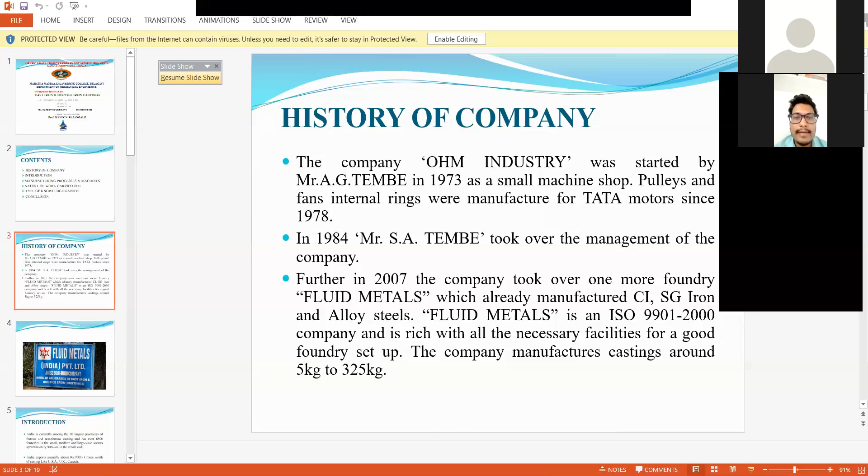Introduction: the Indian foundry industry occupies a place in shaping the country's economy.

India is currently among the 10 largest producers of ferrous and non-ferrous castings and has over 6,500 foundries in the small, medium, and large scale sectors. Approximately 90% are in the small scale industries.

India exports annually above 7001 crores worth of castings to countries like USA, UK, and Canada. However, there is still a lot that needs to be done to improve this further.

The export of casting from India is around 1% of the world requirement, and in order to increase these exports, the Indian foundry industry has to equip itself with the latest technology such as automation and casting simulation, etc.

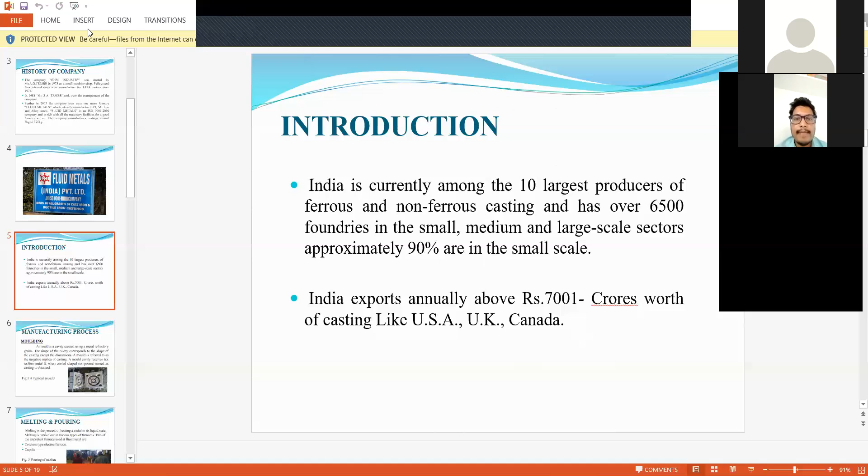Next is the manufacturing process. It is a stepwise process. Casting is a manufacturing process in which molten metal is poured into a mold containing a hollow cavity of the desired shape, and then allowed to solidify. The solidified parts are known as castings.

Next is molding. Figure 1 shows a typical mold. A mold is a cavity created using metal refractory grains, and is referred to as the negative replica of the casting. The mold cavity receives the hot molten metal, and when cool, the shaped component named as the casting is obtained. The figure shows a typical green sand mold.

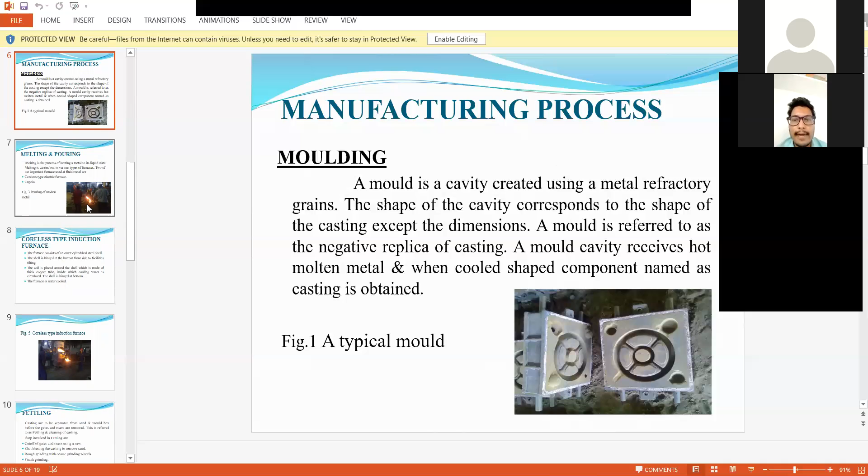Next step: melting and pouring. Melting is the process of heating the metal into its liquid state. Melting is carried out in various types of furnace.

There are two types of important furnaces used for fluid metals: the coreless type induction furnace and the cupola furnace. Figure 3 shows the pouring of the molten metal.

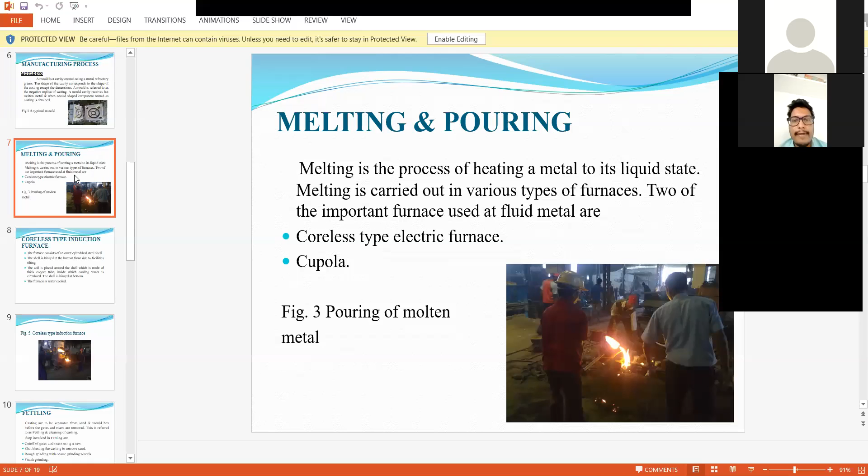Next step is the coreless type induction furnace, also known as the electric induction furnace. The furnace consists of an outer cylindrical steel shell. The shell is hinged at the bottom front side to facilitate tilting. The coil is placed around the shell, made of copper tube, inside which cooling water is circulated to protect it from overheating, and the shell is hinged at the bottom. The furnace is water cooled, and the crucible refractory lining is formed by ramming granulated material between the coil and the hollow interior.

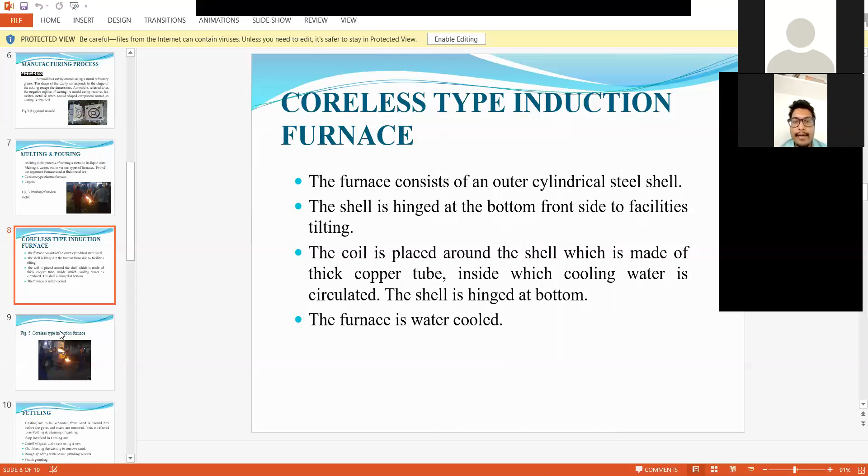The coreless type induction furnace is commonly used to melt various alloys of steel and iron, producing the molten liquid metal.

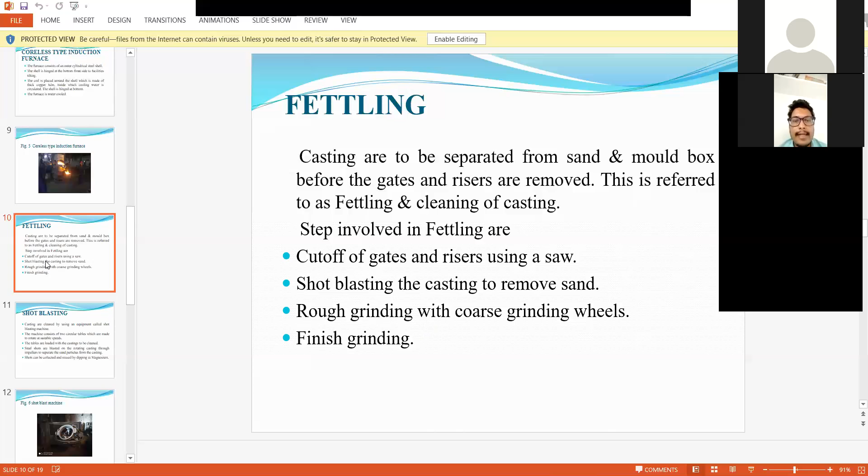The next step after fettling is shot blasting. This is a casting cleaning process used to polish the metal. The casting is cleaned using equipment called a shot blasting machine, which is carried out once the core has been removed from the sand mold.

The machine consists of two circular tables which are made to rotate at a suitable speed. The tables are loaded with the casting to be cleaned. The steel shots are blasted on the rotating casting through the impeller to separate the sand particles from the casting. Then the steel shots are placed on the table.

When the steel shot media is channeled, the abrasive steel shots are accelerated and thrown at high velocity in the direction of the surface of the work material. This is perfect for finishing, and the shots are collected, recycled and reused by dipping in magnesium.

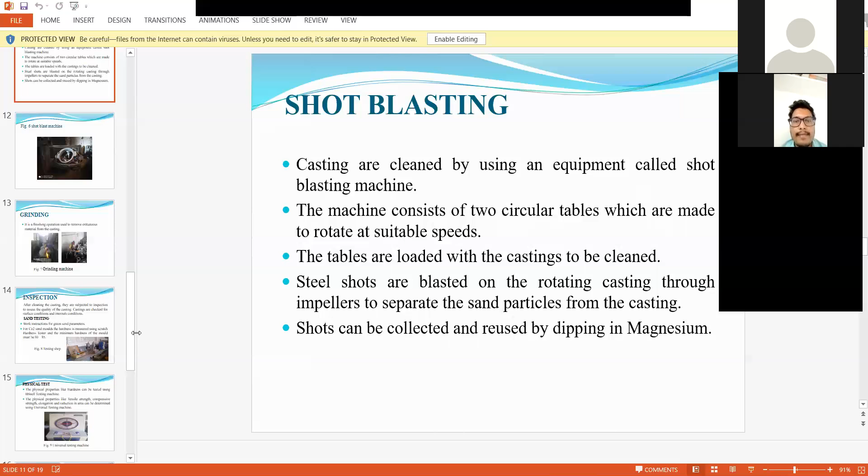The figure shows the shot blasting machine.

After shot blasting, the next step is grinding. In this process, it is a finishing operation used to remove extraneous material from the casting.

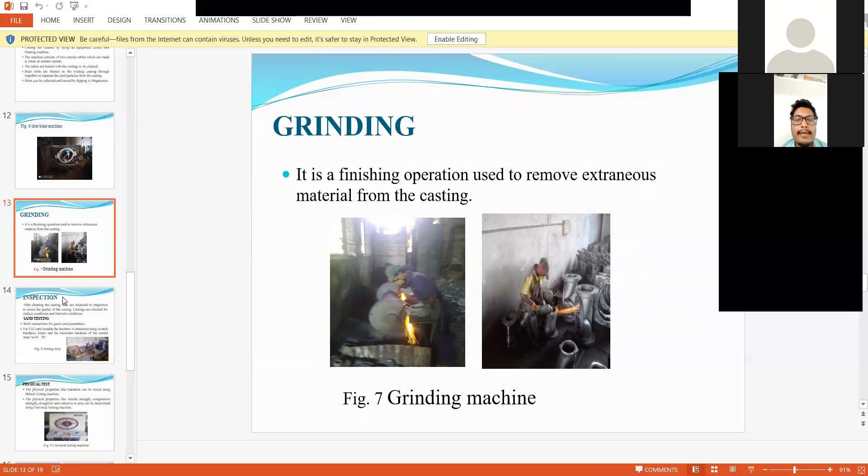The last step is to check the casting for cracks and defects; this is the inspection stage. After cleaning the casting, it is subjected to inspection to assess the quality. Castings are checked for surface condition and internal condition.

In the usual inspection, common defects such as surface roughness and surface cracks are detected by visual inspection of the casting. For sand casting, there is a work instruction for the green sand parameters and the carbon dioxide sand molds.

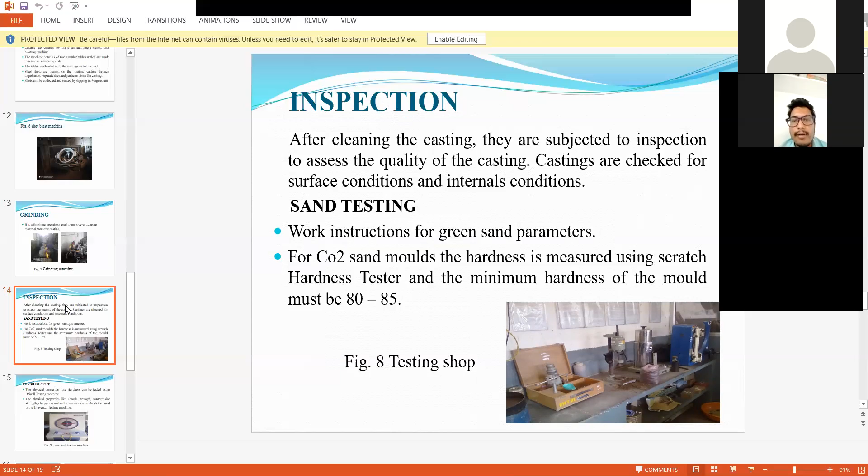The hardness is measured using the scratch hardness tester, and the minimum hardness of the mold must be 80 to 85. Figure 8 shows the testing shop of the cast.

Next is the physical test. Figure number 9 shows the universal testing machine. Physical properties like hardness can be tested using the Brinell test machine. Physical properties like tensile strength, compressive strength, elongation and reduction in area are determined using the universal testing machine.

In this test, a specimen of given dimensions is held in the jaws of the machine, and then the load is applied uniformly until the specimen breaks. A recorder is used to record the graph of the stress-strain properties, and with the help of this graph, the different properties are calculated.

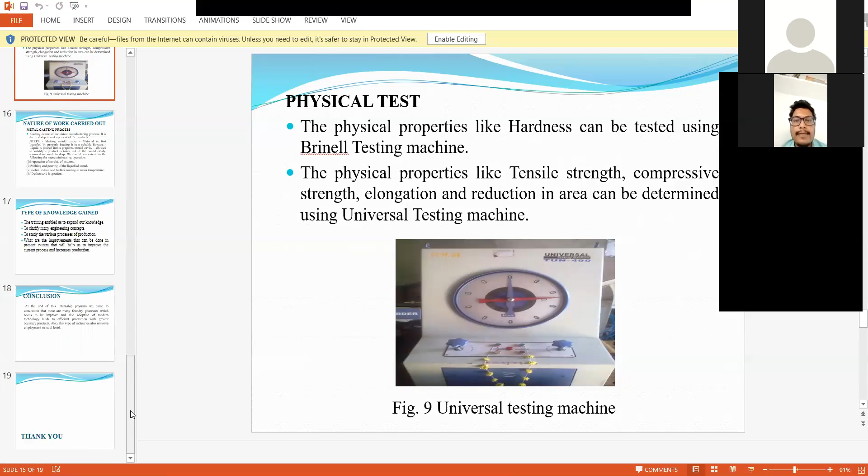Next, the nature of work to be carried out. In the metal casting process, casting is one of the oldest manufacturing processes.

It is the first step of making most products, making the mold cavity. Material is first liquefied by heating it in a suitable furnace, then the liquid is poured into a prepared mold cavity and allowed to solidify. The product is then taken out of the mold cavity, trimmed and made to shape.

We should concentrate on the following for a successful casting operation: preparation of the mold and pattern, then melting and pouring of the liquefied metal, then solidification and further cooling to room temperature, and the last step is inspection, checking for defects in the casting.

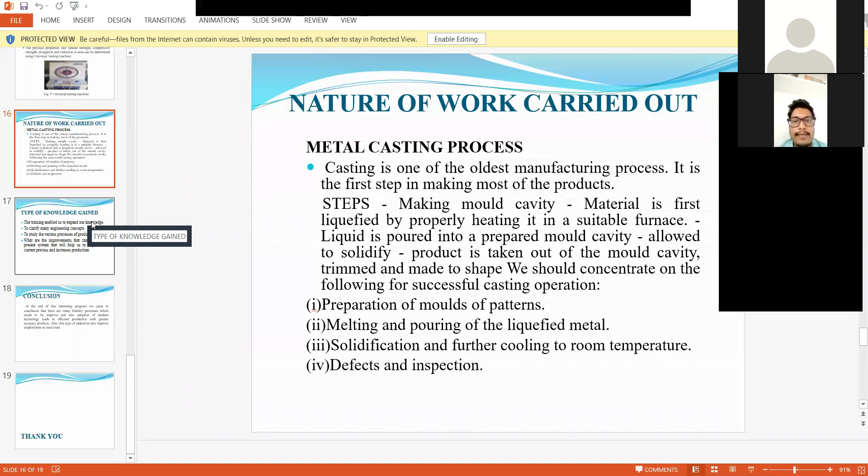Next, the types of knowledge to be gained in this industry. The training enables us to expand our knowledge, to clarify many engineering concepts, and to study the various production processes. It tells us how production processes are carried out, from raw materials to finished products, and what improvements can be made in the present system to help improve the current process and increase production.

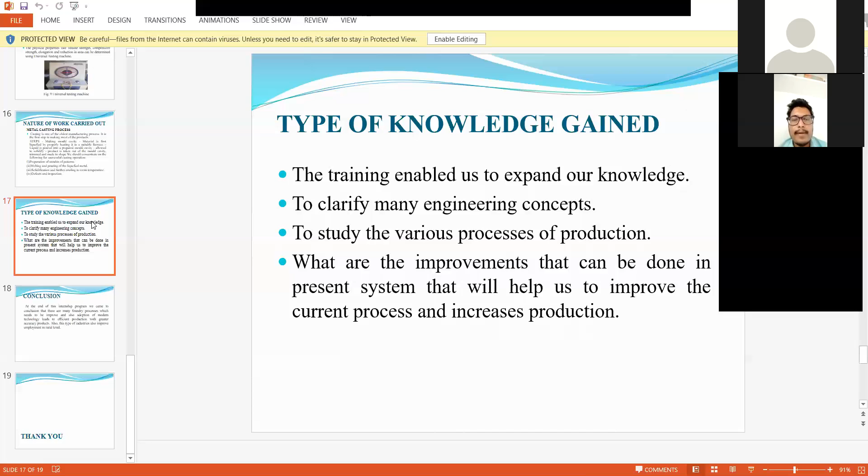And conclusion. At the end of this internship program, we can conclude that there are many foundry processes which need to improve, and also adoption of modern technology leads to efficient production with greater product accuracy. Also, this type of industry improves employment at the rural level.

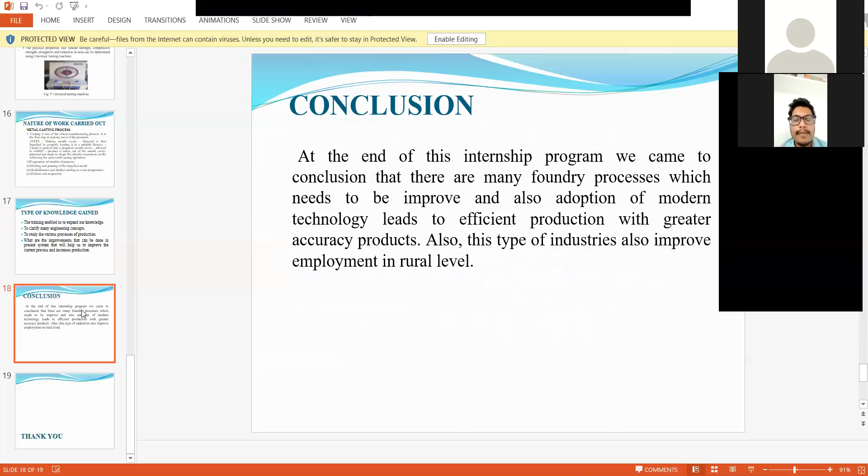Okay, Sujit. In total, how many departments are there in that small factory, in the plant? So in total, how many sections are there? Three to four sections. Three to four. Okay. In one section, sir, inspection and detection machines are there. In another, cupola and coreless type induction furnace is there, and the other section has shot blasting machine and grinding machines.

And the designing, where they are doing it, which software are they using for designing these mold castings? So which software are they using? Design and casting. Are they doing any design in the plant? SolidWorks. Design of what, sir? No, is any design department there? Design department is not there.

Then if the customer comes and gives the order, when they receive the order, where does it go first, which department will take care of that? As soon as the order is received, who will receive the order in the company? If the customer came, whom does the customer have to meet in that company? Then after the customer meets that particular person, how does the process go sequentially? If the customer comes with an order, whom does he have to meet, and after receiving that order, how does it get processed? So can you give the flowchart of that? Explain how it works, what will happen there.